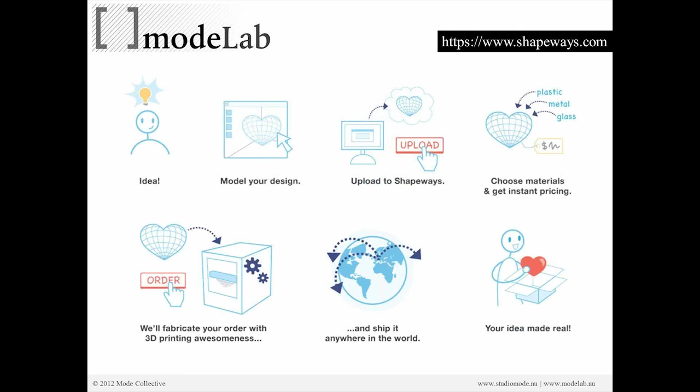It's pretty wild stuff. And again, if you'd like to check this out, here at the top right is the Shapeways web address. You have multiple types of materials that you can use, and you can choose price, detail level, strength, smoothness, etc. Let's say, for instance, we wanted to look at the strong and flexible plastic here, although it would be really neat to look at the full color sandstone. When you go over here to the drop down for strong and flexible plastics, you'll see it gives you a material overview. Not only can you pick that material, but you can also pick what color, whether or not it's polished, right? And it will give you some design guidelines here to follow.

Now it tells you when it'll ship, if they're greater than a certain size that it'll take a little bit longer, that there's a handling fee, what is the volume cost of the material, the minimum wall thickness, and then the maximum bounding box. So really, really cool. A lot of information that is relevant to us.

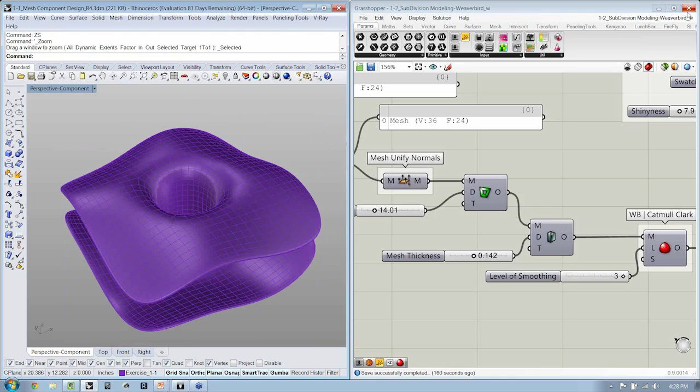And so looking at our component here, moving it out of the Rhino environment into fabrication, we'll say File, Export Selected. We're going to export this as an STL. We're going to hit Save and hit OK.

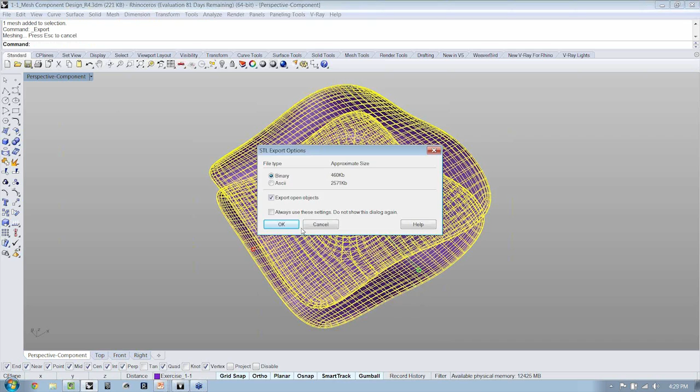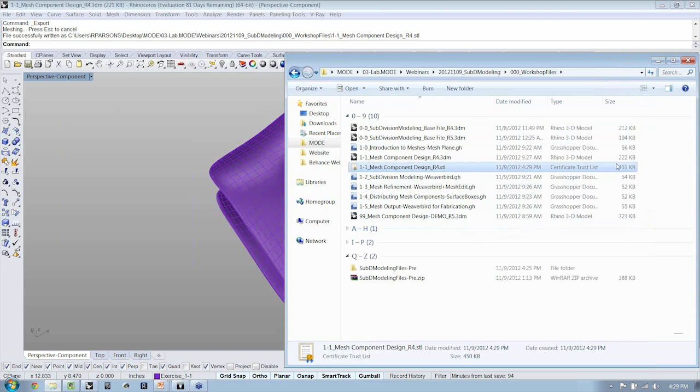Now, browsing over to our folder where we were working, we'll see that we now have an STL that we can use. You can notice the file size is quite small, to import and upload to Shapeways. And so that's really fantastic. And if we come over here, we'll go ahead and open up the Shapeways website for us to peek at.

You can see that there are a lot of tutorials here that you can use. That next step, design, upload, and 3D print, to go from your STL to your printed output, you can just follow this link right here. And really the only step is to just register and upload your STL. So it's a pretty painless process to make that next step from the output here to the 3D print.

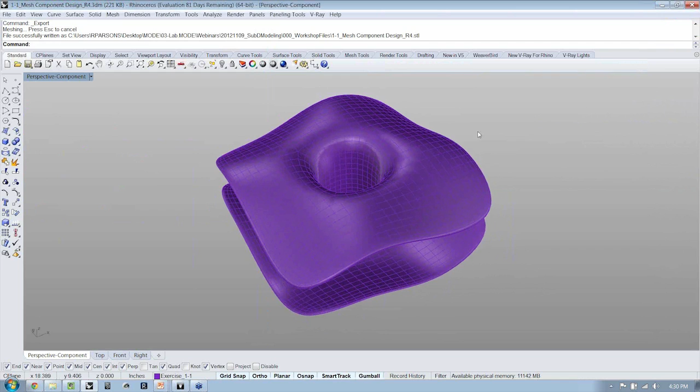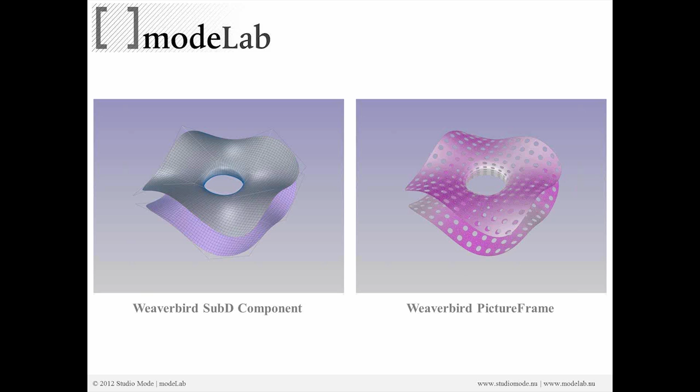Now, moving forward, going further, right? Weaverbird picture frame, again, something very interesting to take a look at, take advantage of. It's really fantastic, and we'll be covering a lot of this, different ways of tessellating, picture framing, variable offsets, all of these things in the Lattice Lab workshop that we'll be conducting next weekend. We are creating a collection of tools for the upcoming Lattice Lab, which will incorporate new custom mesh previews. These things will be distributed via ModeLab. You guys will all receive a notification of this via the newsletter.

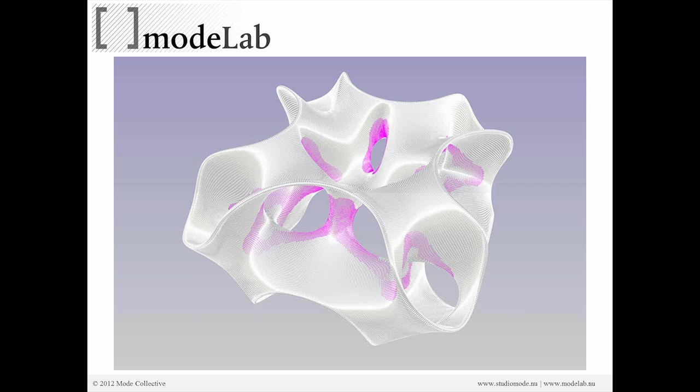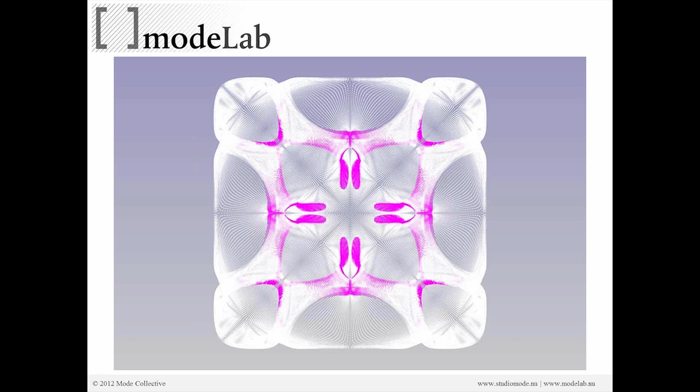Here you can see the mesh, and in pink it starts to indicate areas where mesh minimum wall thickness tolerances have been exceeded. So in the modeling environment, you can start to catch any areas of failure before you even export, to help facilitate the design to fabrication process. Here you can see another custom preview that is a vertex-only shader preview with a gradual shading per vertex based on wall thickness, as well as a set of tools that we're developing, again, for the Lattice Lab, that will allow you to start to work with mesh animation.